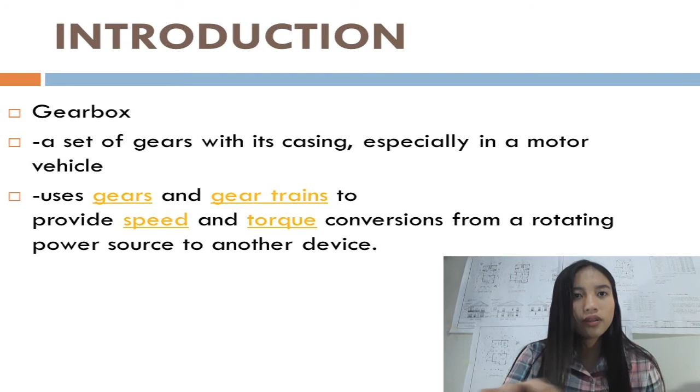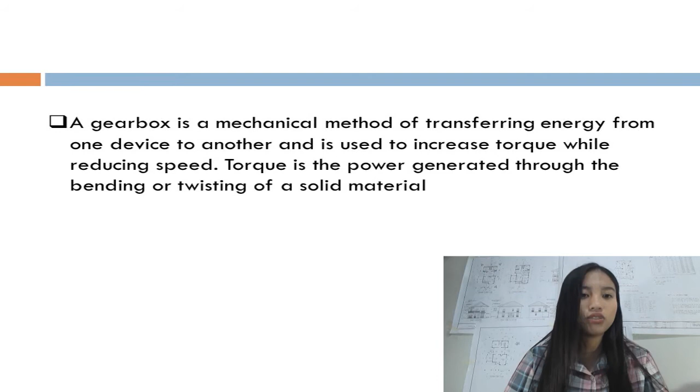So that's a gearbox. A gearbox is a mechanical method of transferring energy from one device to another and is used to increase torque while reducing speed. Torque is the power generated through the bending or twisting of a solid material.

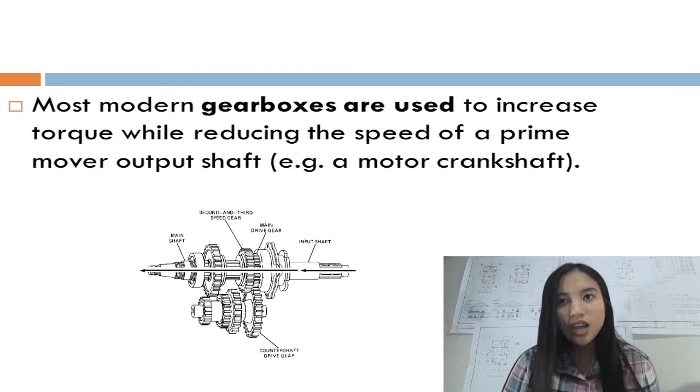Most modern gearboxes are used to increase torque while reducing the speed of a prime mover output shaft. This means the output shaft of the gearbox rotates at a slower rate than the input shaft, and this reduction in speed produces a mechanical advantage, increasing torque.

In a situation where multiple speeds are needed, a transmission with multiple gears can be used to increase torque while slowing down the output speed. This design is commonly found in automobile transmissions.

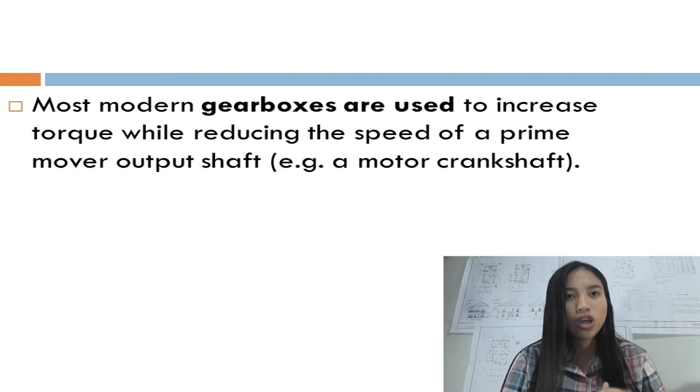The same principles can be used to create an overdrive gear that increases output speed while decreasing torque. So gearboxes allow you to change gears in the vehicle so that the motor is used most efficiently.

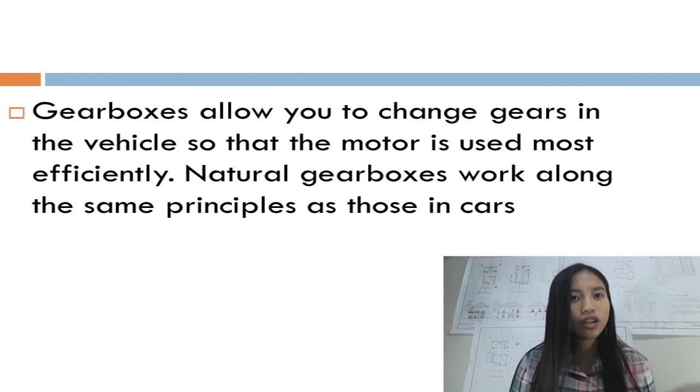Natural gearboxes work along the same principles as those in cars. In cars, at least four gears are used to transmit power from the engine to the wheels. It is possible to drive smoothly only when the gears are used in succession, from low gear to high and back again. Instead of gears in cars, which are heavy and take up a lot of room, flies have mechanisms that take up only a few cubic millimeters.

Thanks to their far more functional mechanisms, flies can beat their wings with ease. Gears were a logical continuation of the invention of the wheel.

That gears are called the biggest invention after the wheel is not unthinkable. We can't live a normal day in our lives without gears. Without gears, no production, no energy, and no transport. The use of gears is so obvious that we never dwell on where they came from.

So in this video, you will see the mechanical principles of gearboxes, the history of gearboxes, and the organisms in nature that have a gearbox.

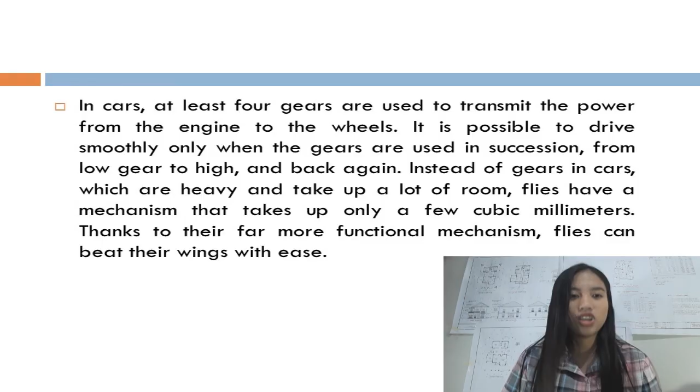I'll be discussing how gears evolved in nature long before humans even invented them. Gears were a thing before humans had the idea and concept of gears, which is applied in our everyday lives. Gears are often found in automobiles, machines, and etc.

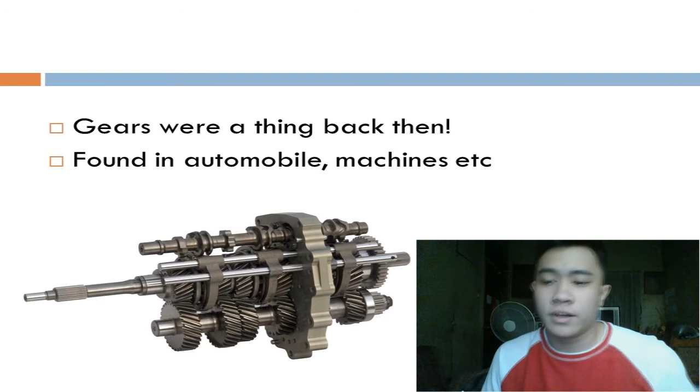A gear system similar to those used on bicycles has been found in insects, proving that nature developed cogs long before humans. The juvenile Issus, a plant-hopping insect found in gardens across Europe, has hind leg joints with curved, cog-like strips of opposing teeth that intermesh.

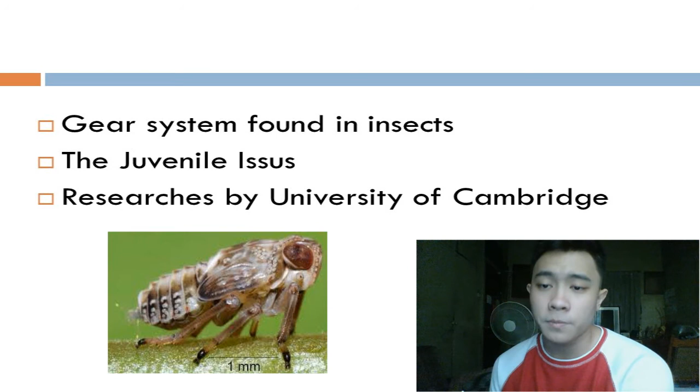These teeth rotate like mechanical gears to synchronize the animal's legs when it launches into a jump. Researchers from the University of Cambridge said that their find demonstrates that the gear mechanism, previously thought to be pioneered by humans, has an evolutionary precedent.

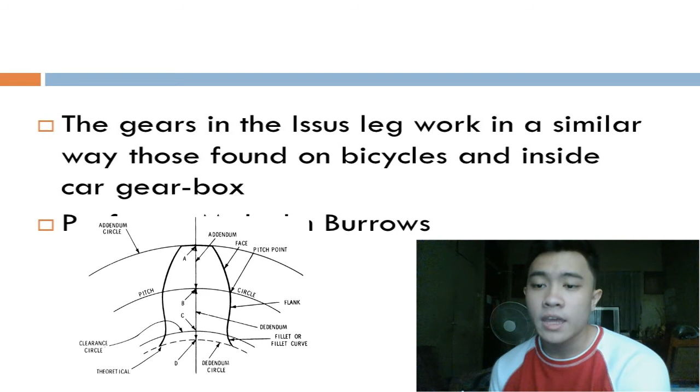The gears in the Issus leg work in a similar way to those found on bicycles and inside car gearboxes. The gear teeth on the opposing hind legs lock together like those in a car gearbox, ensuring almost complete synchronicity in leg movement. This helps with the powerful jumps the insects use to get around.

Professor Malcolm Burrows said that this precise synchronization would be impossible to achieve through a nervous system, as neural impulses would take far too long for the extraordinarily tight coordination required.

By developing mechanical gears, the Issus can send nerve signals to its muscles to produce roughly the same amount of force. Then, if one leg starts to propel the jump, the gears will interlock, creating absolute synchronicity.

So the concept of gears is that when one part of the machine, or in this case the Issus, works, as one part of its body works, the rotating gears enable it to function as one. So the grinding of the teeth of the gears is what allows the movement to occur.

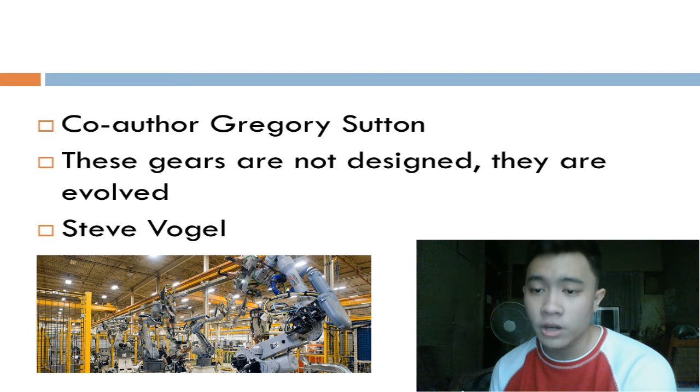Co-author Gregory Sutton, now at the University of Bristol, said, we usually think of gears as something that we see in human design machinery, but we found that is only because we didn't look hard enough. These gears are not designed, they are evolved, representing high speed and precision machinery evolved for the synchronization in the animal world.

The gears are only found in juvenile insects and are lost as they pass into adulthood. Another odd thing about this discovery is that although there are many jumping insects like the Issus, including ones that are even faster and better jumpers, the Issus is apparently the only one with natural gears. Most other bugs synchronize the quick jolt of their leaping legs through friction, using bumpy and grippy surfaces to press the top of their legs together.

Says Duke University biomechanics expert Steve Vogel, who was not involved in this study: like gears, this ensures the legs move at the same rate, but without requiring a complicated interlocking mechanism. There are a lot of friction pads around, and they accomplish pretty much of the same thing. He says that, so I wonder what extra capacity these gears confer. They're rather specialized, and there are a lot of other jumpers that don't have them. So there must be some kind of advantage.

So gears are not an ordinary thing, it is not simple. You may look at it as simply two round objects that are rotating with each other, or as the teeth on their edge interlocking. Basically, gears have a lot of principles that should be studied.

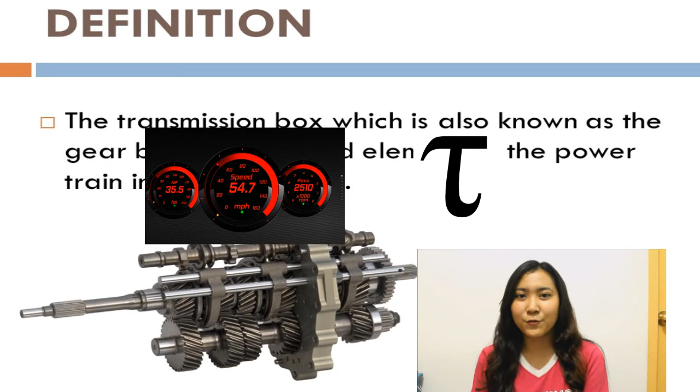I will be discussing the mechanical principles of a gearbox. But first, let us define what a gearbox is. A gearbox, also known as a transmission box, is the second element of the powertrain in an automobile. It is used to change the speed and torque of a vehicle according to a variety of road and load conditions. Brief history about the gearbox.

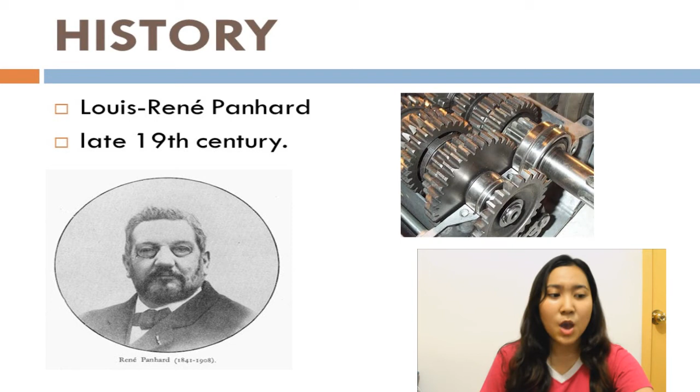The earliest form of manual transmission is thought to have been invented by Louis-René Panhard in the late 19th century. This type of transmission offered multiple gear ratios and in most cases reverse. The gears were typically engaged by sliding them on their shafts, which required careful timing and throttle manipulation when shifting, so that the gears would be spinning at roughly the same speed when engaged. Otherwise, the teeth would refuse to mesh.

These transmissions are called sliding mesh transmission, or sometimes crash boxes, because of the difficulty in changing gears and the loud grinding noise that is often accompanied with it.

Main functions of a gearbox. First is to provide the torque needed to move the vehicle under a variety of road and load conditions. This is done by changing the gear ratio between the engine crankshaft and the vehicle drive wheels. Second is to be shifted into reverse so that the vehicle can move backward, and lastly, to be shifted into neutral for starting the engine.

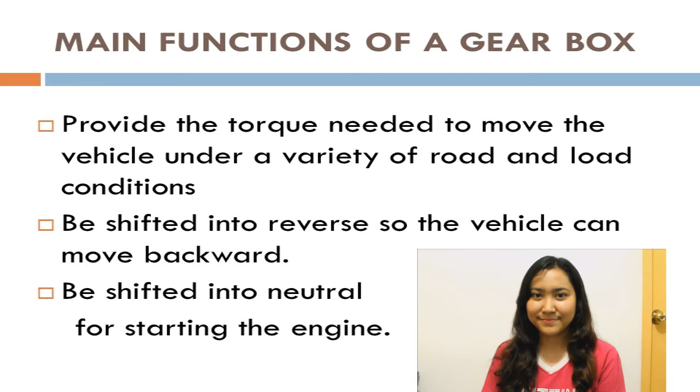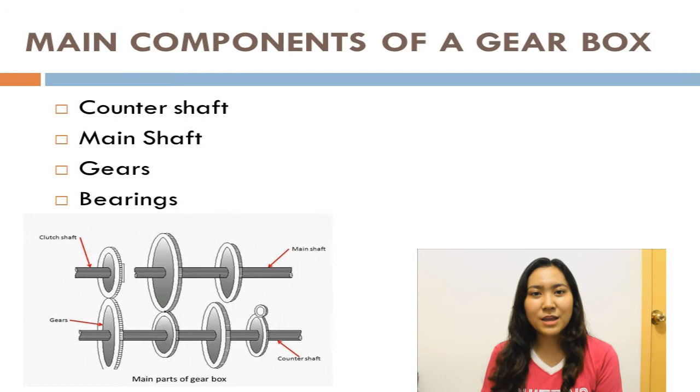Main components of a gearbox. In any device, two or more components work together and fulfill the required function. In a transmission box, 4 components are required to fulfill its function. First is the counter shaft. The counter shaft is a shaft which connects with the clutch shaft directly. It contains the gear which connects it to the clutch shaft as well as to the main shaft. It may run at the engine speed or lower than the engine speed according to the gear ratio.

Next is the main shaft. It is the shaft which runs at the vehicle speed. It carries the power from the counter shaft by use of gears, and according to the gear ratio, it runs at different speed and torque compared to the counter shaft. One end of this shaft is connected with the universal joint.

Next is the gears. Gears are used to transmit power from one shaft to another. They are the most useful component of the transmission box because the variation in torque of the counter shaft and main shaft is dependent on the gear ratio.

The gear ratio is the ratio of the driven gear to the driving gear teeth. If the gear ratio is larger than 1, the main shaft revolves at lower speed than the counter shaft, and the torque of the main shaft is higher than the counter shaft. On the other hand, if the gear ratio is less than 1, the main shaft revolves at higher speed than the counter shaft, and the torque of the main shaft is lower than the counter shaft.

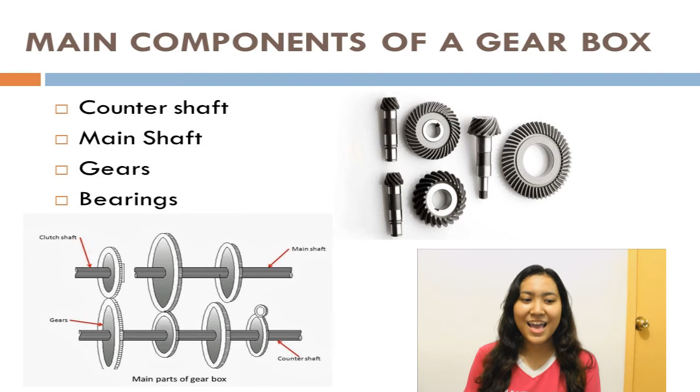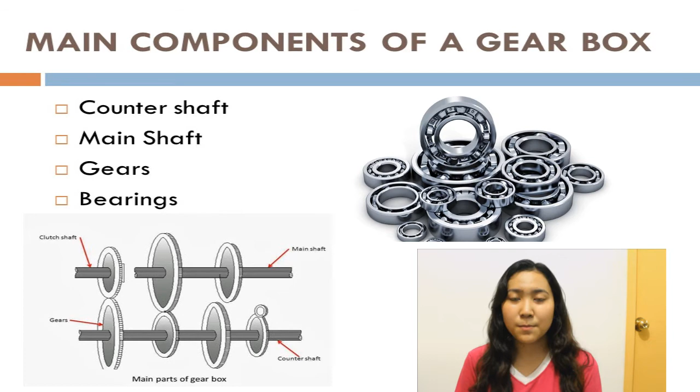A small car gearbox contains 4 speed gear ratios and 1 reverse gear ratio. Lastly is the bearings. Whenever there is rotary motion, a bearing is required to support the revolving part and reduce the friction. In the gearbox, both the counter shaft and main shaft are supported by bearings.

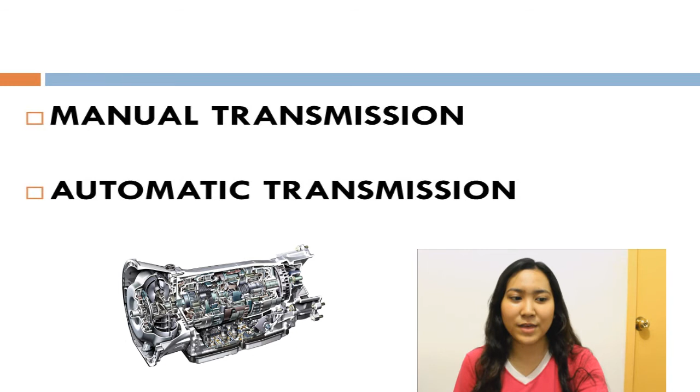Transmissions can be categorized into two, namely the automatic transmission and the manual transmission. The basic question is, why is transmission required in an automobile? The power generated by an engine flows through the transmission before it reaches the drive wheels. The basic function of a transmission is to control the speed and torque available to the drive wheels for different driving conditions.

Manual transmission works on a simple principle of gear ratio. The automatic transmission was invented in 1921 by Alfred Horner. This is a type of motor vehicle transmission that can automatically change gear ratios as the vehicle moves, freeing the driver from having to shift gears manually. Like other transmission systems on a vehicle, it allows an internal combustion engine best suited to run at a relatively high rotational speed to provide a range of speed and torque outputs necessary for vehicular travel.

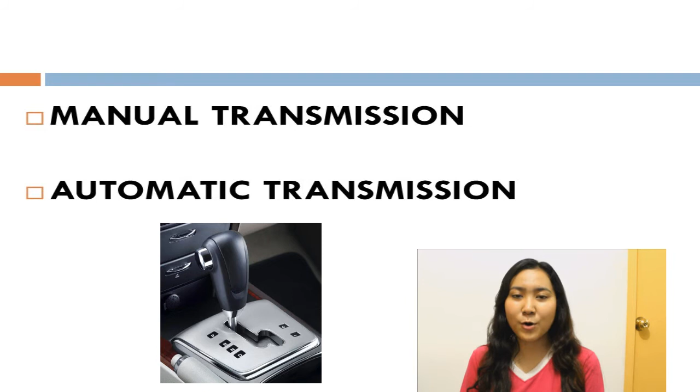The number of forward gear ratios is often expressed for automatic transmissions as well.

The working principle of a gearbox: in a gearbox, the counter shaft is meshed to the clutch with the use of a couple of gears, so the counter shaft is always in running condition. When the counter shaft is brought in contact with the main shaft by the use of meshing gears, the main shaft starts to rotate according to the gear ratio. When you want to change the gear ratio, you simply press the clutch pedal, which disconnects the counter shaft from the engine, and change the gear shift lever.

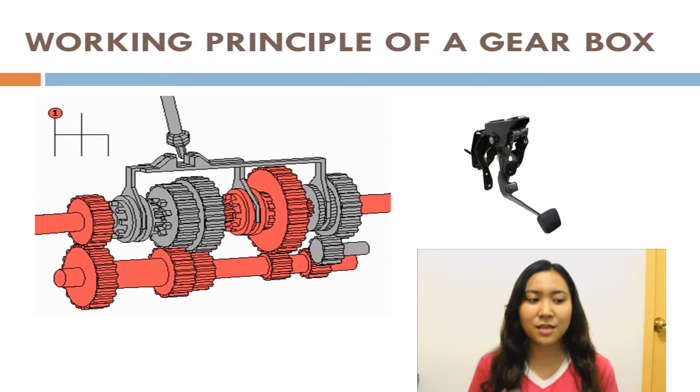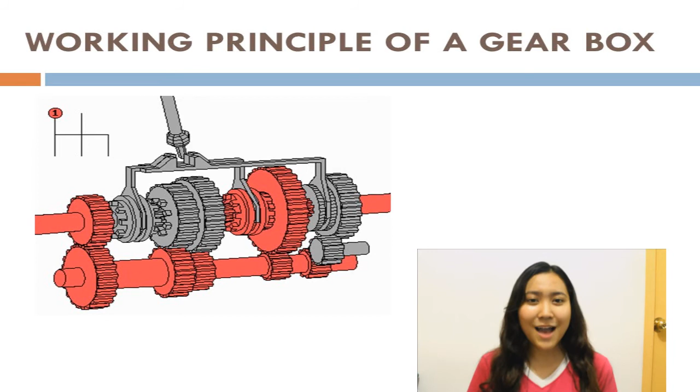In a gearbox, the gear teeth and other moving metal must not touch. They must be continuously separated by a thin film of lubricant. This prevents excessive wear and early failure. Therefore, a gearbox runs partially filled with lubricant oil.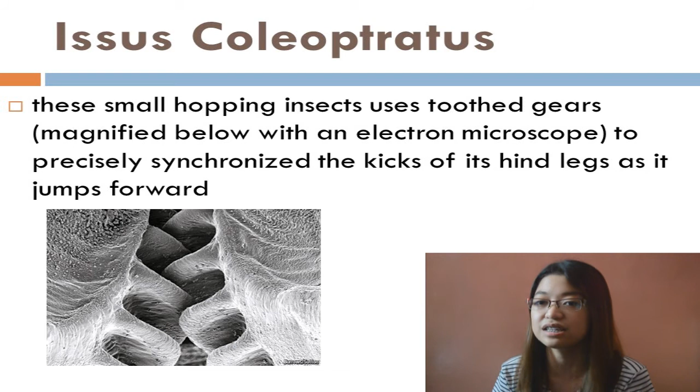Organisms that have parts which function like a gearbox: the first example we have is the Issus. This is a small hopping insect that uses toothed gears on its joints to precisely synchronize the kicks of its hind legs as it jumps forward. Findings published in Science magazine by Malcolm Burrows and Gregory Sutton, a pair of biologists from the University of Cambridge in the United Kingdom, have been able to reveal this functioning natural gear through a combination of anatomical analysis and high-speed video capture of normal Issus movement.

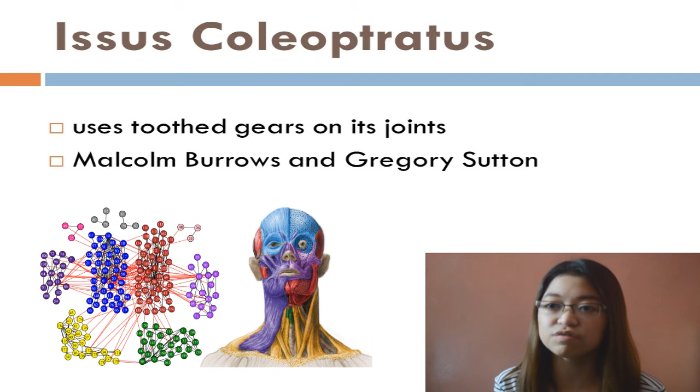This is the first plant hopper species in which the function of these gears was described, designed to keep the insect's legs synchronized when it jumps. More intriguingly, the gear teeth have rounded corners at the point they mesh, a feature that engineers use in man-made gears as a shock-absorbing function to prevent the gear's teeth from breaking off.

The insect's gears are used on their opposing hind legs to lock them together and synchronize movement during powerful jumps. Without the precision provided by the gears, an Issus would spin out of control. The gears, though, are found only in the insect's juvenile or nymph stages, when they cast off rigid skin as they grow. Why the gears disappear by adulthood is not known, but the researchers suspect it may be similar to a problem that every car maker faces.

If one tooth in the gearbox breaks, the whole mechanism is impaired. Perhaps the juvenile Issus can repair a broken gear tooth in one of its regenerative stages, but it would be unable to do that as an adult.

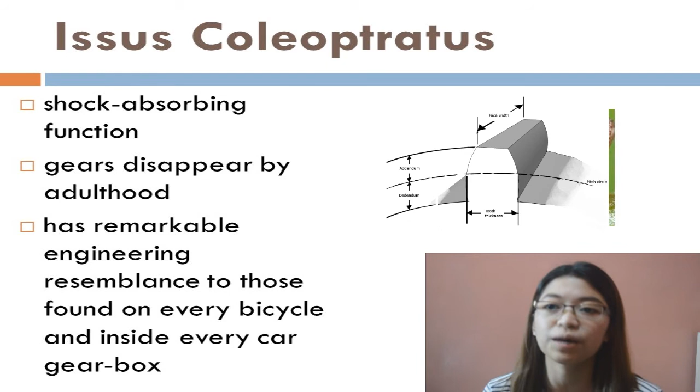The gears in the Issus hind leg bear remarkable engineering resemblance to those found on every bicycle and inside every car gearbox. Each gear tooth has a rounded corner at the point it connects to the gear strip, a feature identical to man-made gears such as bike gears, essentially a shock-absorbing mechanism to stop teeth from shearing off.

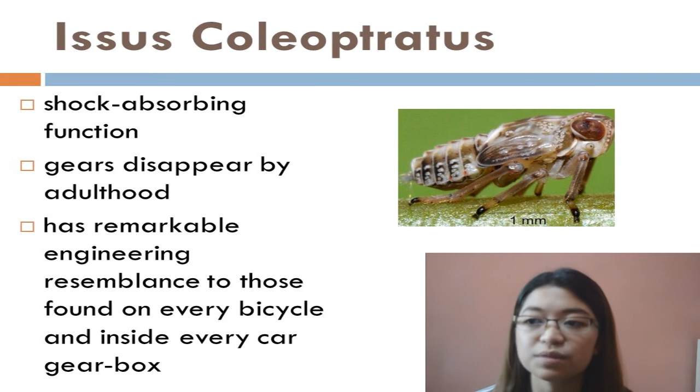Another organism that seems to have a part of its anatomy similar to a gearbox is the ground pangolin. The pangolin alters its shape in order to roll. Its ability to roll powerfully and change its direction while rolling is similar to a gearbox. This ability helps them protect themselves when they are frightened or threatened. When pangolins are threatened, they can roll into an almost impregnable ball.

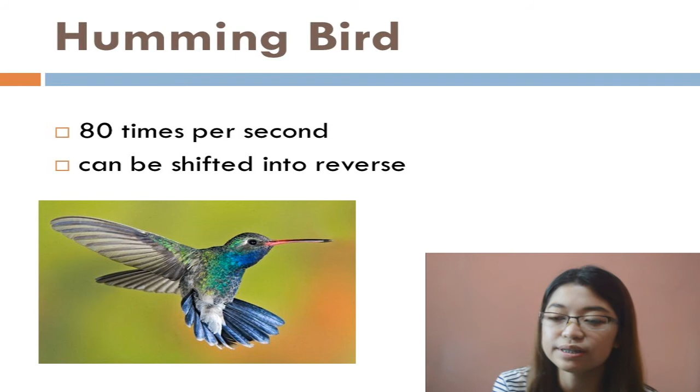Hummingbirds can flap their wings so fast, at about 80 times per second. They can fly right, left, up or down, backwards, or even upside down. Their wings function like a gearbox; it can be shifted into reverse so the vehicle can move backward. With this ability, hummingbirds can fly precisely under normal conditions, and it could help the organism reduce time in calibrating its movements because it can move in any direction it wants.

Other species that function as a gearbox.

Bell jelly. The bell jelly is not a true jelly but rather a hydromedusa, usually smaller than true jellies and not nearly as colorful. A bell jelly has a translucent bell and a clapper-shaped mouth stalk. Bell jellies also have 100 or more wispy tentacles and red ocelli, or eye spots, which are sensitive to light.

Bell jellies are probably vertical migrators. They remain in dark, deep waters during the day and come to the surface at night. A bell jelly spends about half its time near the seafloor, where it feeds on small benthic or bottom-dwelling creatures.

Bell jellies often hop up from the seafloor. This movement may stir up sediments, uncovering potential food. They also swim to the surface and sink back down to the seafloor, a process that lets them collect plankton as they drift. Second is the salp.

A salp is a barrel-shaped planktonic tunicate. It moves by contracting, thus pumping water through its gelatinous body. Salp jet propulsion is one of the most efficient in the animal kingdom. The salp strains the pumped water through its internal feeding filters, feeding on phytoplankton.

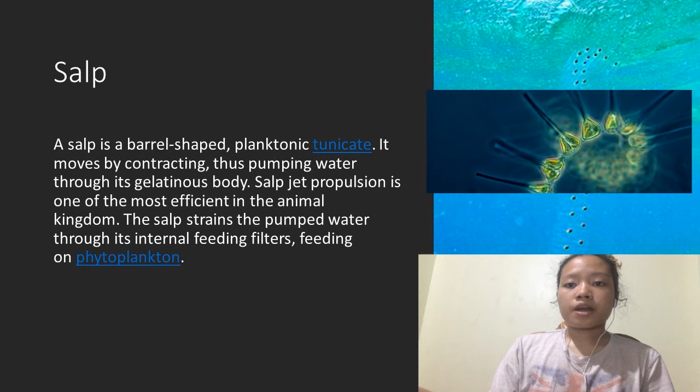Comparing this species to a gearbox, it also has a pumping system to propel rockets and make them move. Rocket propulsion is like the bell jelly and salps: they can draw water from the front and expel it from the rear. This ability can help these species catch their prey.

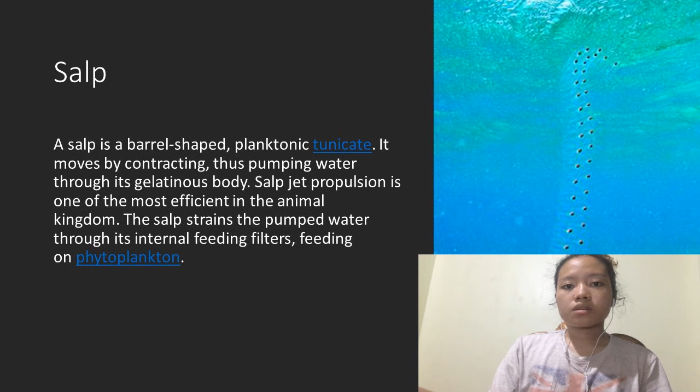The third species is Bivalve. Clams, mussels, oysters, and scallops are members of the class Bivalvia, or Pelecypoda. Bivalves have two shells connected by a flexible ligament, which encase and shield the soft vulnerable parts of the creature. All 15,000 known species of bivalves are aquatic in nature, with close to 80% being marine or saltwater environment animals.

Living at the bottom of the marine environment, bivalves tend to either swim, using their mantle cavity to force water movement, burrow into the sand, or attach themselves to an object with sticky strings called byssal threads.

The style consists of a transparent glycoprotein rod, which is continuously formed in a cilia-lined sac and extends into the stomach. The cilia rotate the rod so that it becomes wrapped in strands of mucus. As the rod slowly dissolves in the stomach, it releases digestive enzymes.

Estimates of the speed of rotation of the style in vivo vary significantly, and it is unclear if the style is rotated continuously or intermittently.

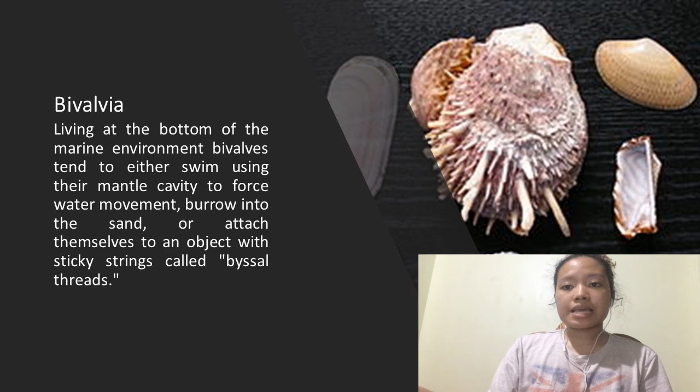Some organisms use rolling as a means of locomotion. These examples do not constitute the use of a wheel, as the organism rotates as a whole rather than employing separate parts which rotate independently.

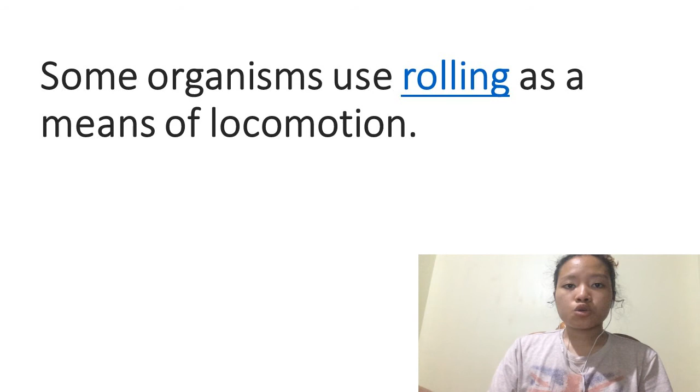The first example is a tumbleweed. Tumbleweeds are the above-ground portions of certain plants which separate from their root structure and roll in the wind to distribute their seeds.

It is a structural part of the above-ground anatomy of a number of species of plants, a diaspore that, once it is mature and dry, detaches from its root or stem and tumbles away in the wind. In most such species, the tumbleweed is in effect the entire plant apart from the root system.

But in other plants, a hollow fruit or an inflorescence might serve this function. Tumbleweed species occur most commonly in steppe and arid ecologies, where frequent wind and open environments permit rolling without obstruction. Apart from its propagules, that is its seeds or spores, the tissues of the tumbleweed structures are dead.

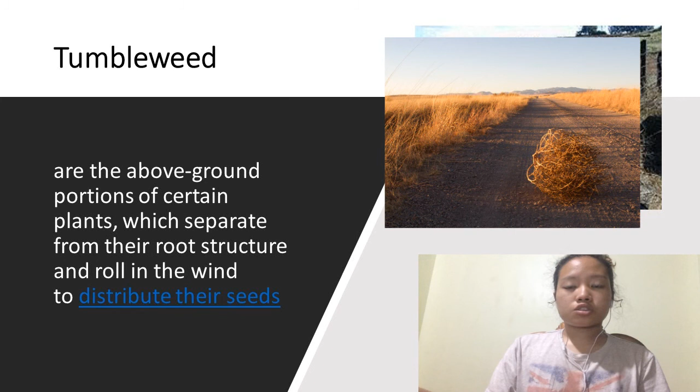Their death is functional because it is necessary for the structure to degrade gradually and fall apart so that the propagules can escape during the tumbling, or germinate after the tumbleweed has come to rest in a wet location. In the latter case, many species of tumbleweed open mechanically, releasing their seeds as they swell when they absorb water.

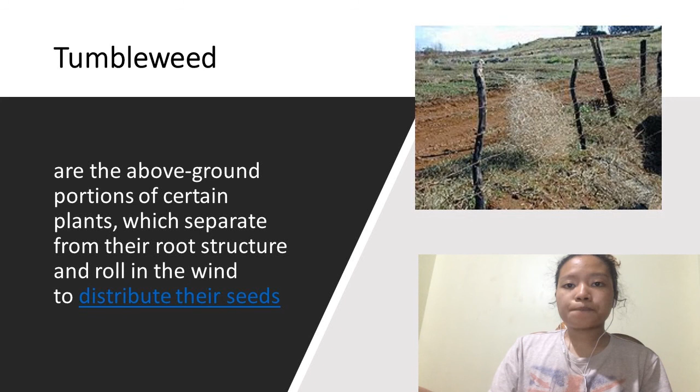The tumbleweed diaspore disperses propagules, but the tumbleweed strategy is not limited to seed plants. Some species of spore-bearing cryptogams, such as Selaginella, form tumbleweeds, and some fungi that resemble puffballs dry out, break free of their attachment, and are similarly tumbled by the wind, dispersing spores as they go.

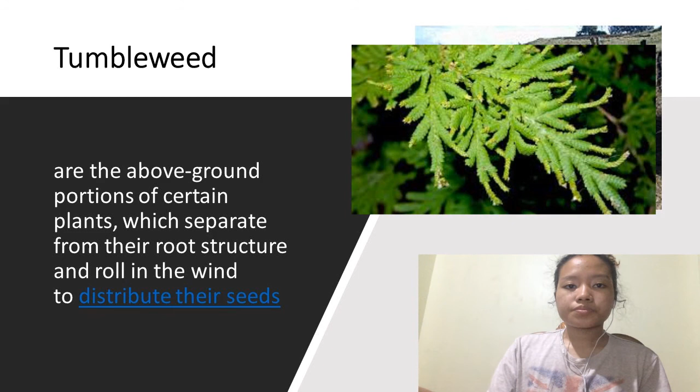There are several species of elongate organisms that will form their bodies into a loop in order to roll. An example of this is Myriapoda, a subphylum of arthropods containing millipedes, centipedes, and others.

The group contains over 16,000 species, most of which are terrestrial. Although their name suggests they have myriad, or 10,000, legs, myriapods range from having up to 750 legs, the millipede, to having fewer than 10 legs.

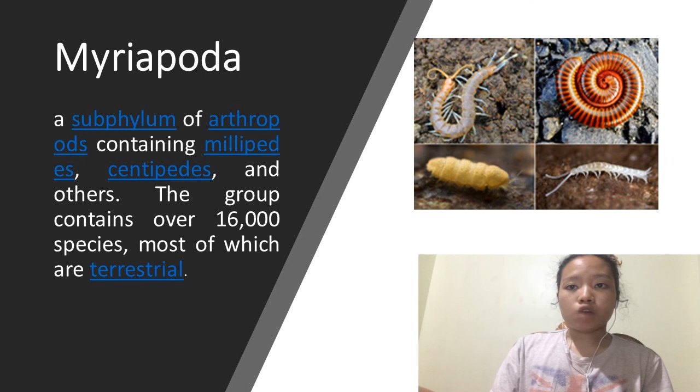And there are other species that adopt a more spherical posture, primarily for defense, which may allow rolling. The armadillo girdled lizard, also known as the armadillo lizard, golden armadillo lizard, or armadillo spiny-tailed lizard, is a girdled lizard endemic to desert areas along the western coast of South Africa. In 2011, it was moved to its own genus based on molecular phylogeny, but formerly it was included in Cordylus.

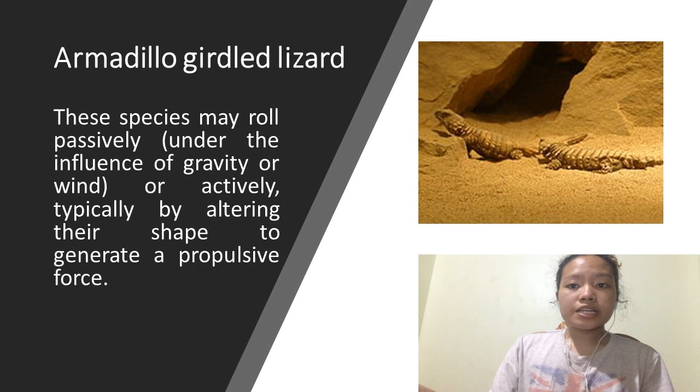These species may roll passively under the influence of gravity or wind, or actively, typically by altering their shape to generate a propulsive force.